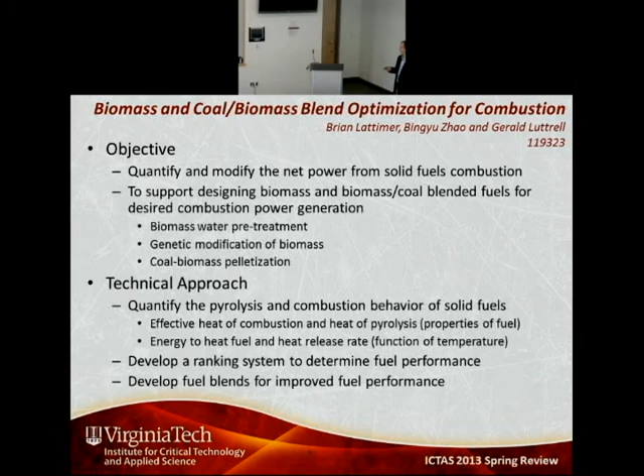So the technical approach here is primarily experimental with just a touch of theory to try to help us in the ranking of the fuels. And so to date, we've really focused on quantifying the combustion characteristics of the fuels and developing the data to support our methodology for ranking that I'll go into in a second.

Then really doing these experiments on a number of different materials so we can develop and evaluate this ranking system. And then lastly, working with our partners in developing fuel blends or genetically modifying fuels and seeing which of these options are better for different applications.

So for fuels, obviously there's a lot of different kinds of biomass, a lot of different kinds of coal, and so we had to really focus down on which kind of fuels we're going to focus on for this seed project. So in this, we're just using one kind of coal, eastern coal, and two different kinds of biomass, switchgrass and corn stover. For the genetically modified biomass, we're just looking at genetically modified switchgrass. So we have pure or natural switchgrass, as well as genetically modified switchgrass. And then we're looking at blends of these fuels.

For example, I'll comment a little bit on an 80-20 blend, 80% coal, 20% biomass, which is kind of the sort of arbitrarily identified upper limit of where you can use biomass in the current grate systems today. And we've also done a little bit on industrial waste like glycerol and municipal waste, plastics and cardboard that you might run into as well.

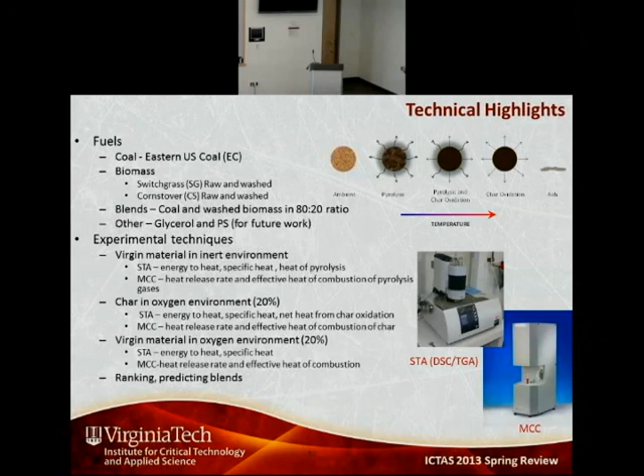And we can do this in controlled environments, zero oxygen, our choice of oxygen concentration. We can do it staged, so we could understand what's going on in pyrolysis, as well as what's going on with char oxidation, and then try to put those two things together to say, okay, if we want to start the fuel off in an oxygen-containing environment, how's it going to evolve during that process, which is the more real process. And then we'll use this data to do the ranking.

So I'm going to just talk a little bit about how we do fuel ranking. What we tried to do was define a fuel efficiency. To define the fuel efficiency, we had what we want out of the system. We want the fuel to produce energy, so that's in the numerator. This is just a kind of basic thermodynamic efficiency. And then in the denominator is what we've got to do to get that out, and what we have to do is put energy into it. So these are the two things that we've got to measure so that we can define this fuel efficiency.

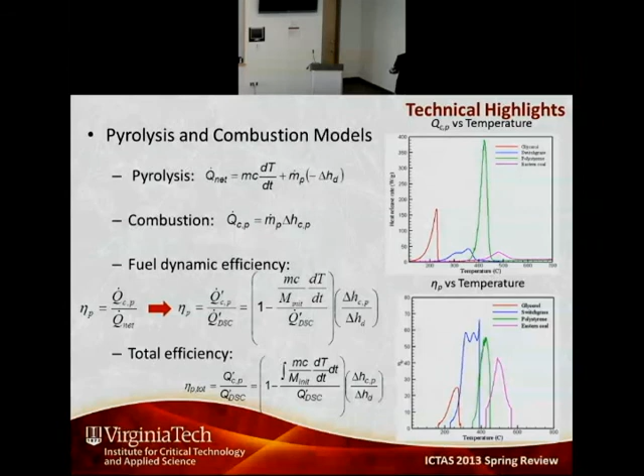So the first one is the energy required to heat this up, and that just comes out of the DSC. If we are really careful, and this is not an easy measurement to make, as Gaurav can attest, we get the sensible heat, the amount of energy just to heat up the material, as well as the latent heat. And if we do this for pyrolysis, we just have the heat of decomposition here. Then what we want to get out is the energy produced by these gases, or if we have charring, surface oxidation kind of events as well. For that, we can get that from the micro-combustion calorimeter.

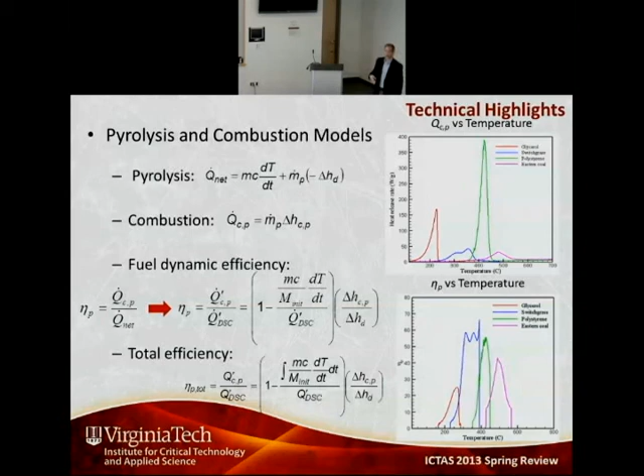We can get both of those things as a function of temperature, and so then you can define this efficiency as a function of temperature. And the nice thing about that is you can see where different fuels like glycerol, switchgrass, polystyrene, or eastern coal all give different high efficiencies, and that occurs at different temperatures. So that's one way that we can manipulate fuels to maybe generate energy at different points in a cycle. The other way we can look at this is from a total efficiency point of view, just by integrating these terms, and that perhaps gives us a better judge of fuel ranking.

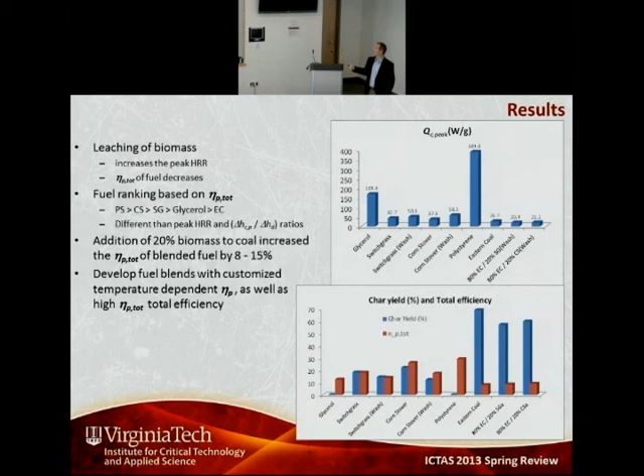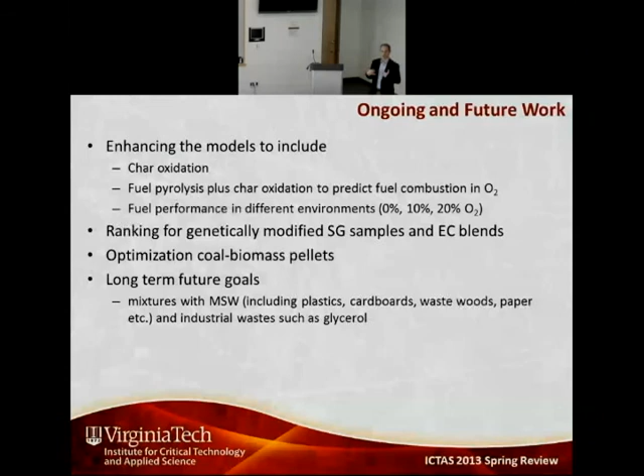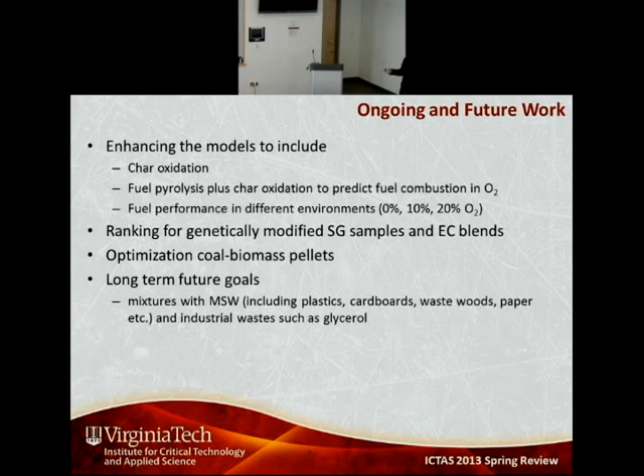And so we get some pretty interesting trends, and I'm running out of time here, but one of the things I just want to point out is the amount of energy. One of the ways that people look at fuels is how much energy you're going to get out. That does not necessarily correspond with the best fuel, because it may take a lot of energy to heat that fuel up and decompose it. And so we get a fuel ranking that is counterintuitive relative to the amount of heat you're producing, and that also allows us to make more efficient systems.

We've done this for pyrolysis at this point, and we're integrating the char oxidation aspects, which should be done within a week, and then we're going to start working on some of these genetically modified as well as blended fuels and try to optimize these for different systems, and potentially work in municipal waste. We have published 3 papers relative to this, 1 in a journal and 2 in conferences, and submitted a couple of proposals as well. And I'm going to start trying to partner with some of the people that develop pellets and other systems like that to see if we can assist them now that we have some tools.